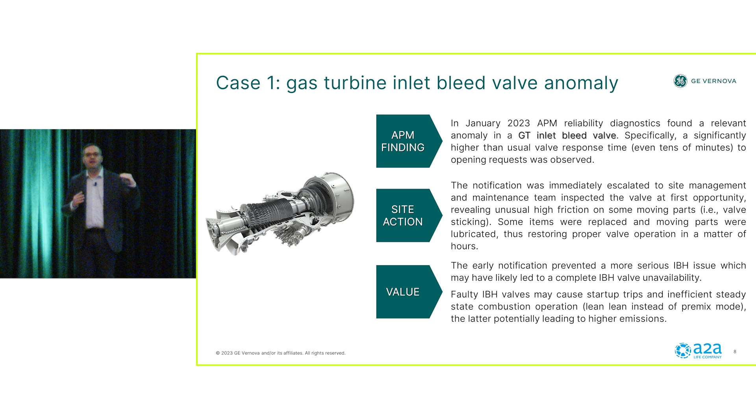So this is the value, and we try to track this in the CBA. We made some assumptions about the economics behind that. I will not discuss it again because that has not been validated by our management yet.

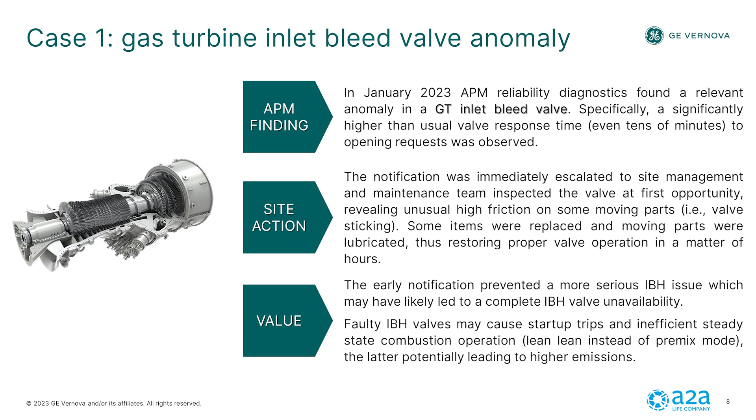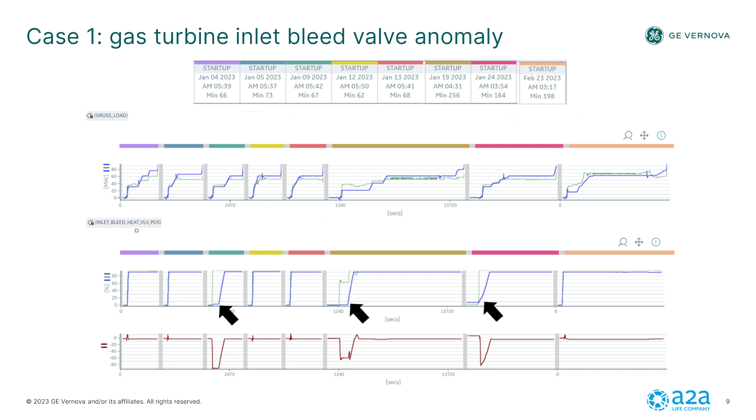What is the evidence supporting this? This came to us as a standard SmartSignal notification in our alert tab, but as supporting evidence, I will show what we call event frame analysis. That is an alternative visualization you may have in APM reliability. You will see 8 different startup situations side by side.

The second one is the actual valve position. And you will see that in 3 different situations, this one on January 9th, this one, and this one, the actual valve operation was way different from the expected situation.

This is another possible visualization you may have in APM. It's called the analysis tab. It has nothing to do with SmartSignal, but it's a tool you can use to better compare your historian data. This is an overlay trend, a simple one.

This is January 9th, one of the 3 situations I pointed out earlier. The blue line here means the opening request by the control system. The orange one is the actual valve position, and you can easily see that it was taking over 10 minutes, which is way too long for this valve to open on that day.

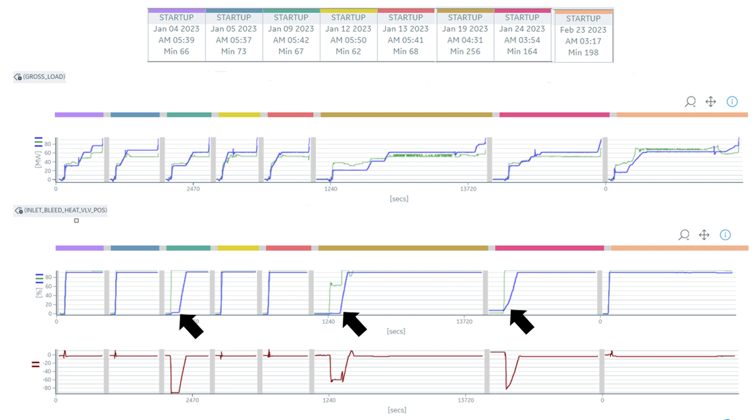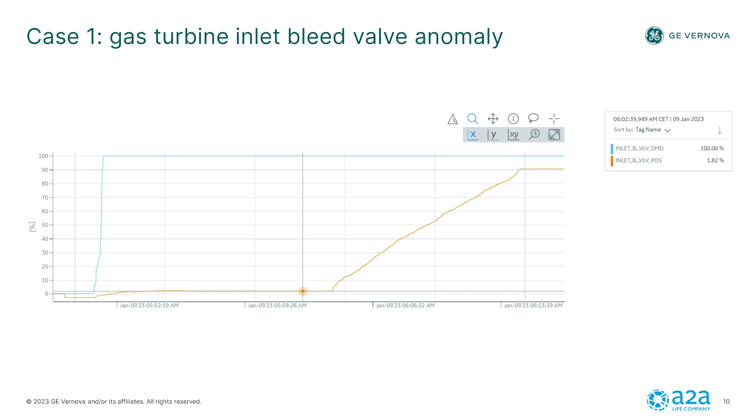The last startup situation here was after the valve was repaired, and so the issue disappeared. It was not persistent, it specifically manifested in cold startups. Still, it was getting more frequent and the magnitude was increasing.

Second one is about a condensate pump anomaly, and specifically APM diagnostics detected a sharp rise in vibrations on a condensate pump motor.

Again, we notified site immediately, and at first opportunity, they replaced the motor with another one they had in stock, and the motor was sent out for repairs.

I do have the details this time about the failure. When the motor was inspected, they found that there were some rotor bars in the motor, and they were loose. So if this was going to go on like that, it is very likely that it was going to lead to a short circuit in the motor, so a much larger damage to the equipment.

In terms of availability, it has to be considered that this specific power plant has two fully redundant condensate pumps, so the likelihood of having complete unavailability for the power plant is not that high, yet in our experience, not zero, because the backup pump, standby pump was supposed to kick in case the master one fails.

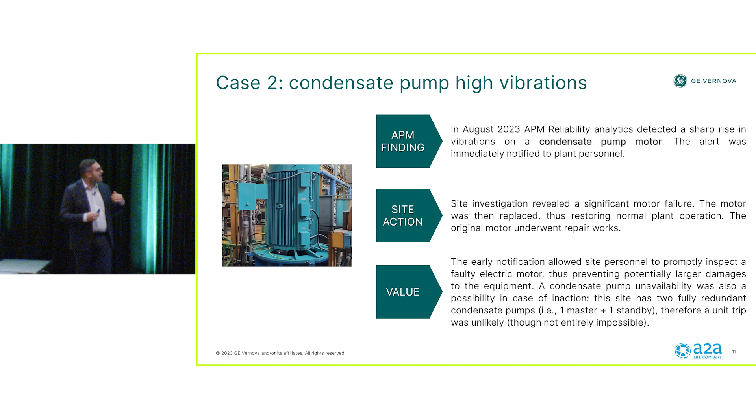What's for sure is that if you allow something like that to go on, you're likely to get a short circuit in your motor, and that's something you don't want.

Again, the evidence, that's standard SmartSignal visualization or APM reliability. I kept confusing the words as they are pretty much the same thing in different places.

So the light green box shows normal operation, and you see that the expected value and the real one were very close. So this is the difference between the two of them. It's called residual, and it's near zero.

This is a vibration measurement in millimeter per second. I know you have different units, so it's like inch per second, but it's the same thing. That's the failure. The red box, you see this sharp rise here.

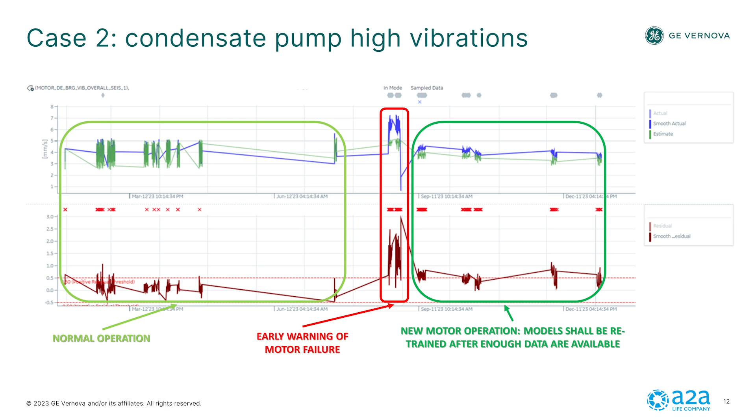And this is what happened after the motor was replaced with another one. As you can see, here we still get notifications by SmartSignal, but the reason is quite simple. It's because this model is no longer representative of our equipment. We need to retrain that because it's another motor, plain simple.

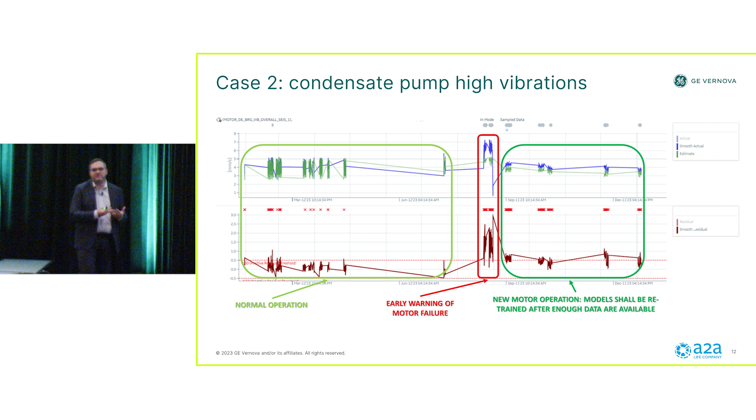We need to wait for some historical data to accumulate, and after we have enough historical data, in our opinion, we go on with retraining.

Last one, step-up transformer for steam turbine. In October last year, thanks to reliability analytics in APM, we detected higher than usual temperatures in this transformer.

When site people were notified about that, they found that two cooling fans had failed, thus not providing enough cooling for the transformer anymore. This was detected very early. The fans were replaced and normal cooling was restored again.

What is the value? Well, I'm not a transformer expert, but I've had the chance to speak to some of them over my career, and they are very concerned about overheating in a transformer.

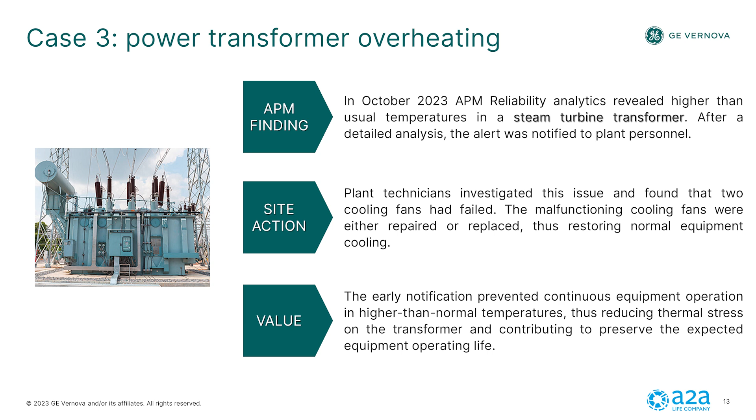If you allow continuous operation in a transformer that is not properly cooled, you will eventually reduce the remaining equipment operating life. And this one, in my opinion, is really interesting to understand how SmartSignal can help you detect very early deviations that would otherwise be unnoticed.

Again, the failure here is in the trend that is highlighted in the red box. And you can notice here that your blue line, although being some 8 or 10 Celsius above the expected value, is well within operable limits.

If you move further here, the dark green box is after the fans were replaced. So this is normal operation again.

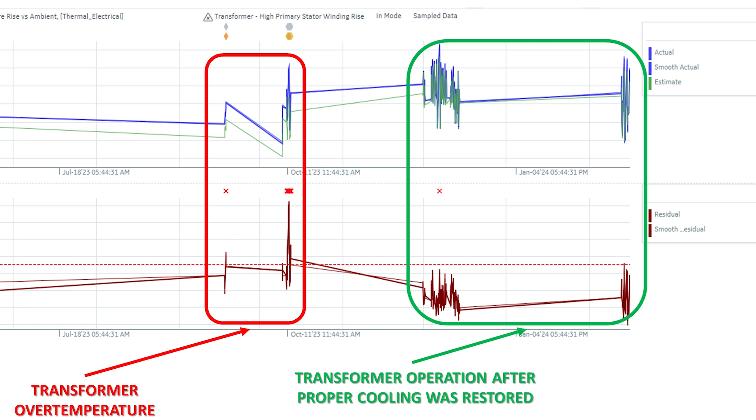And here you have actual values that are higher than those you had here when the equipment was not operating properly. So this means that unless you compare your equipment situation with an expected behavior, something like this will 100% go unnoticed. And if it goes on like that, so load must have been different here, because otherwise it's impossible.

If you continue to operate your equipment like that, when it goes into more demanding operation like summertime, high load, this situation amplifies, and it has to be taken care of at a later time.

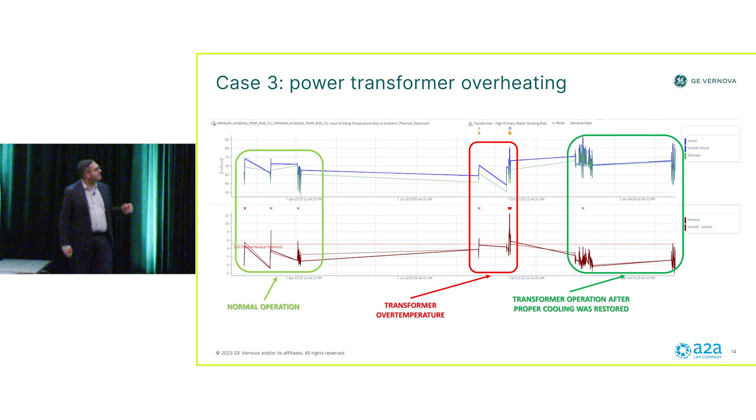So that's, in my opinion, a good example of what early detection means for us and how APM reliability can help us achieve this goal.

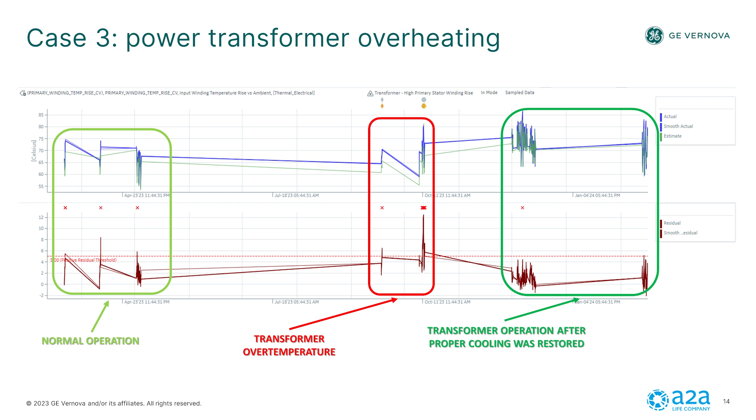And that is, in my opinion, what I want to point out here is that, well, there's still something that is really powerful, at least for steady state monitoring. But for you to achieve results, you have to take care of your models.

Of course, when you implement them, but also afterwards. I mean, you need to continuously work to understand what the alerts are about and to constantly update your models.